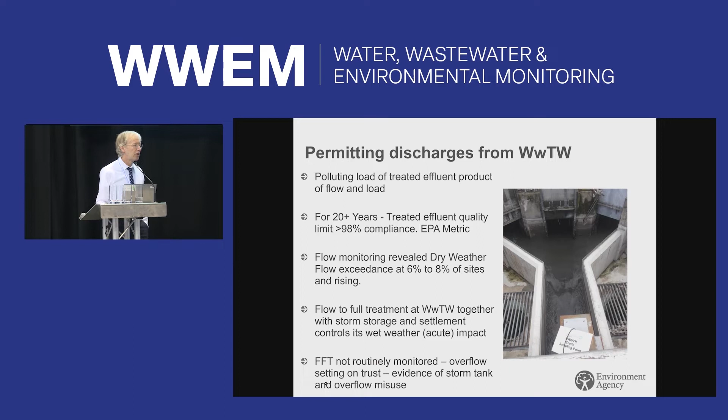The FFT monitoring we put in, whilst we required an accuracy and uncertainty of plus or minus 8%, in reality that was difficult to get without that being part of the funded driver. So some sites didn't meet that. And so it was really a tester. We were trying to justify the need for monitoring because there's a little bit of a chicken and egg going on there without having the evidence of compliance issues. It was not easy to justify to government or through the companies the need for further monitoring.

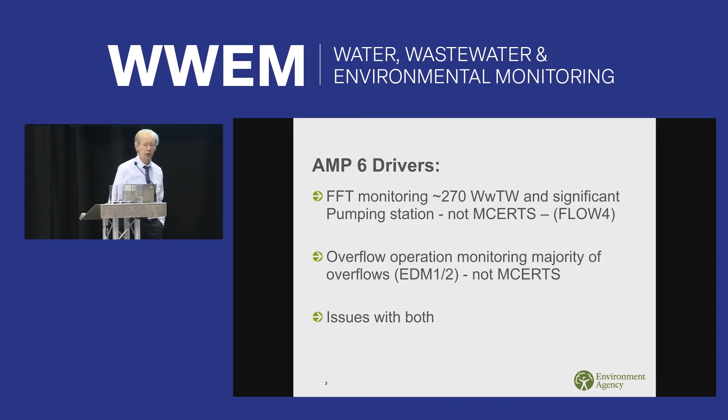So the aims of the PR19 program, which came into effect from 2020, was to improve that regulation for both dry weather flow compliance and for FFT, improve data quality, which had been somewhat lacking, and develop conditions which were more enforceable and more protective of the environment.

So effluent we measure as a total daily volume when we're measuring the effluent flow, the day-to-day flow, and that's MCERTS certified. The current dry weather flow condition, which is the one that governs the day-to-day flow, was improved over 10 years ago and was very much a cooperative driver where we expected the companies under our guidance to manage their FFT, stay compliant with it.

But as we say, because it wasn't a very protective condition, it wasn't a pass-fail, it tended to get overlooked, and there's been a history of non-compliance. The total daily volume is measured as an 80%, a flow that's exceeded on 80% of the days, and it's assessed for compliance against a smaller flow that's exceeded on 90% of the days. And guidance simply requires DWF not to be exceeded.

So if a dry weather flow is exceeded, it prompts an investigation. That investigation is to find out the cause, whether it simply needs an uplift in the applied for dry weather flow and appropriate tightening of quality limits and potentially pass forward flow and storage. But if the investigation found that there was just heavy rainfall throughout the year, so there was no real dry weather flow to be measured, then that was a reason to wait another year to find out if the dry weather flow was repeatedly exceeded.

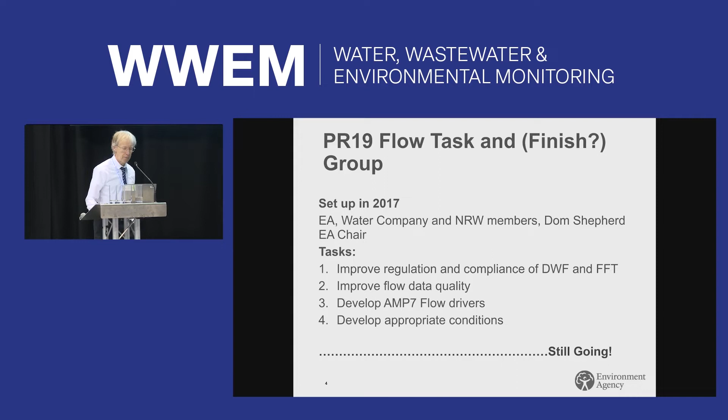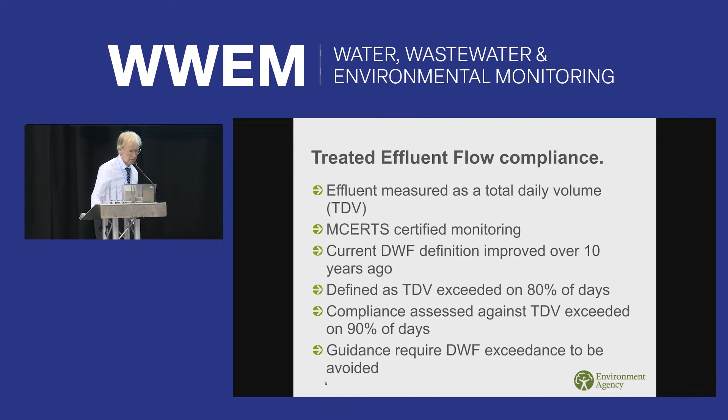So to improve permitting, what we did was retain the dry weather flow limit, but we had new conditions added to it, which only allow 2 exceedances in a 5-year period. If there's a third exceedance, then that becomes an absolute fail. So that will become a clear, unambiguous pass-fail outcome.

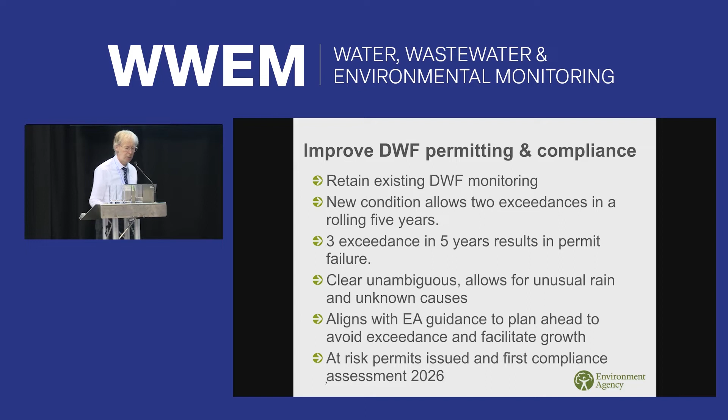This aligns with EA guidance, which was always to prevent dry weather flow exceedances, and it facilitates growth because there's no hold-ups when we're approached for growth. It can take quite some time to get through all the consultation to agree the final effluent limits. So people applying for it after they've already exceeded it was, and still does, cause problems with planning. The first assessment will be in 2026. We've already issued the permits for dry weather flow which were at risk of exceedance, and because they have to look back, first pass-fail will be in 2026.

So why do we monitor FFT then? We've captured the quality and we've captured the volume, and together those give you the polluting load that's being discharged. Well, the FFT, of course, is governing the spill frequency, governing how much spills untreated from storm tanks at sewage works. It's a fairly sensitive setting because it's quite low. It's usually less than 3 times the dry weather flow average. So on a peak, it can quite easily spill if the setting's too low.

And there were pollution incidents caused by settings being too low. There were WFD failures that were unexplained without any evidence of where the pollution was coming from. And site inspections started to reveal issues with FFT compliance. Subsequently, during AMP6, there were high-profile pollution incidents and prosecutions, and that prompted increased interest from public, media, and calls for this compliance aspect to be very clearly transparent.

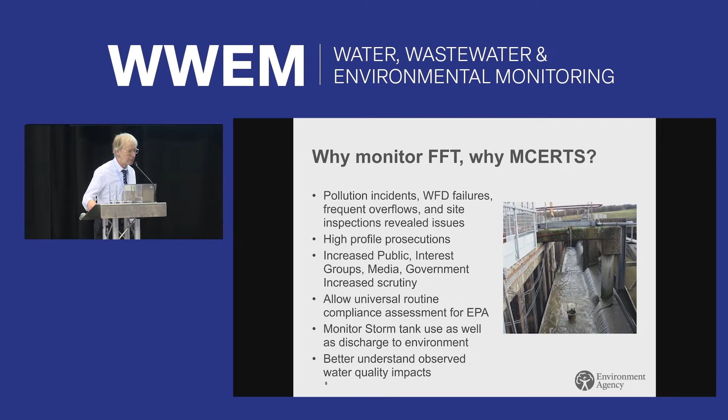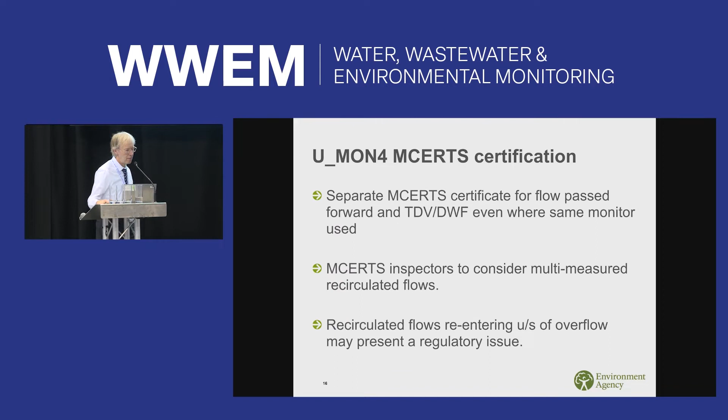So it wants to move. Seems to have frozen. Oh, thank you. It's gone too far now. Yeah, I lost the prompt on the screen. Apologies, it's not wanting to go backwards.

Oh, there we go. Sorry about that.

So, monitoring at FFT: we had a driver in PR19 for event duration monitoring of spills into the storm tank and potentially spills from the storm tank, so we know what's happening there. And then we had a driver called U_MON4, which is to install MCERTS flow monitoring on the flow pass forward at the overflow, and to utilise existing monitors where they're available rather than going to the cost of new ones, and install new ones when needed.

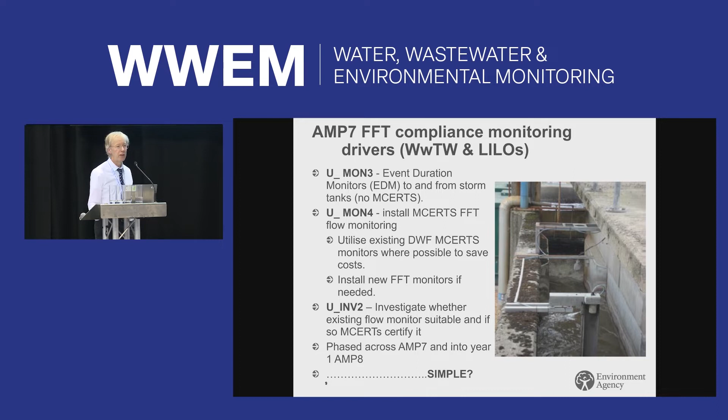There was a U_INV2 investigation which was to look at monitors that may be suitable and to check whether they can be converted, can be adapted to MCERTS during the AMP period, and if they could, they would be delivered in this AMP. If not, they would have to be put forward for the first year of AMP8. That would be 2025-26. And so essentially, by the end of the first year, every sewage works that treats more than 50 metres cubed that has a storm overflow will be monitored for flow pass forward.

So it sounded like a simple driver, but as all things, including this, it doesn't turn out to be. It's not. Yeah.

So companies proposed use of existing monitors. So where they had existing monitors that were not at the front end, not right behind the weir, measuring the pass-forward flow while the overflow's operating, companies thought it may be useful to explore using monitors that are at the back of the sewage works. And there was a UKWIR project carried out to try and find a means of assessing compliance using monitors in that position. Didn't really have a great deal of success, but we left the option open in case anyone came up with a solution.

So during the process the UKWIR project also recommended that EDM monitors also achieve MCERTS, and that was a tough one to convince the companies of, and with it not being funded in this AMP, we've required that at the beginning of the next AMP. And we also had an issue about matching the frequency of data, with the FFT normally being recorded in 15-minute and the spill to the storm tanks and from the storm tanks in 2-minutely. So matching up those flows to assess compliance is an issue as well.

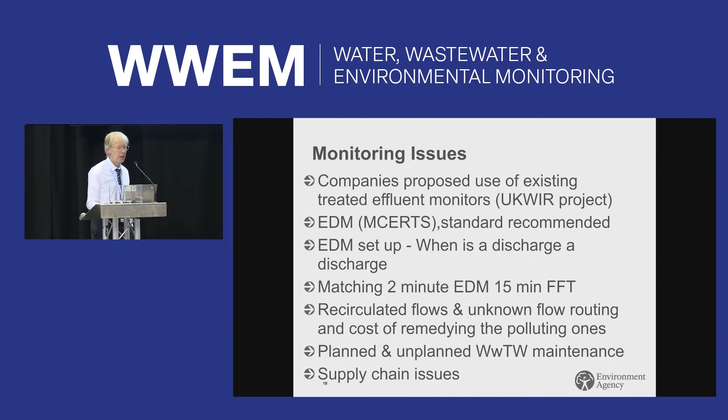And also the companies wanted to use storm tanks in certain circumstances where they were trying to do some maintenance work. And then of course supply chain issues have cropped up as an issue also. So to permit FFT, we already had a condition which basically says the pass-forward flow is a minimum when the overflow is operating. We refer to it as flow pass-forward rather than flow to full treatment, simply because that's the wording in the permits, and it's consistent with storm overflows.

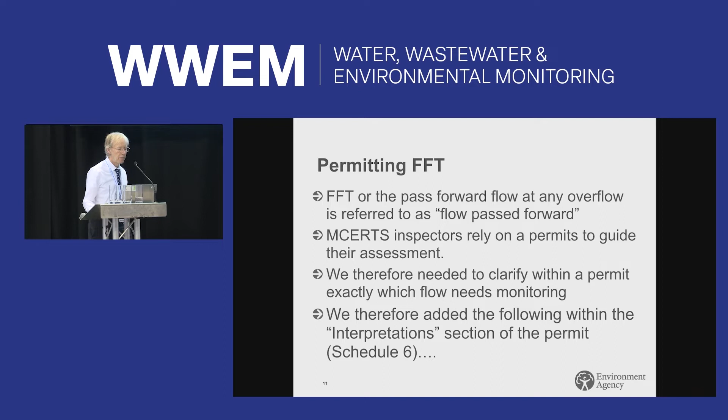MCERTS inspectors rely on a guide as to what flow they need to monitor to be sure that the monitor is monitoring the right flow. So we have to be clear in the permit what the flow is that they're monitoring. And that led to a definition which is up now, and is essentially saying that the FFT is the flow that arrives from the upstream catchment that is then passed forward to treatment.

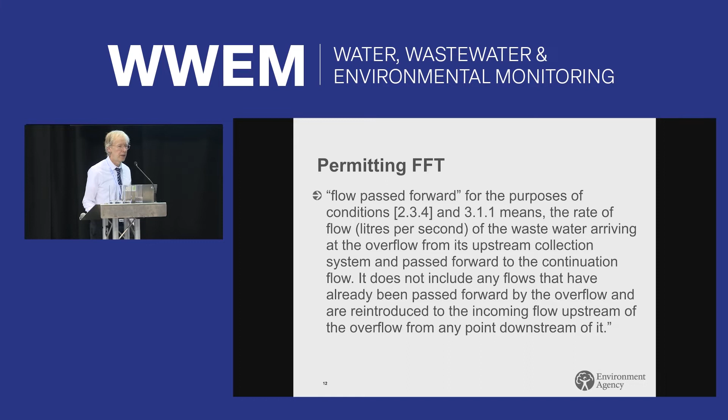Now that sounds patently obvious, and it is, except without that definition inspectors would be left in an ambiguous situation when it comes to return flows. So if there was a return flow which went around the monitor and therefore was double counted by the monitor, they needed to know which return flows to count and which not to count. So the definition was it's got to be from the upstream catchment to be counted.

So essentially the FFT setting condition, the minimum pass-forward flow, remained unchanged, but we added an additional limit so we could measure the performance of the companies rather than it just being a straight pass-fail, in terms of if there was one reading throughout the year that didn't comply with the FFT, then it's a fail, and if there's less than one, it's a pass.

So we added a limit which takes account of potentially the monitoring uncertainty, the monitor in relation to where the pass-forward flow occurs, and we came up with the requirement that 95% of the readings must be greater than 92% of the flow pass forward while the overflow is operating.

And we had a management system objective for the companies to define how they were going to quality assure the data to ensure they only include good data. And then there was a data compliance condition which requires them to have 90% good data for both EDM and flow for 90% of the year, and also that monitors couldn't be down for more than 2 weeks in a row at any one time.

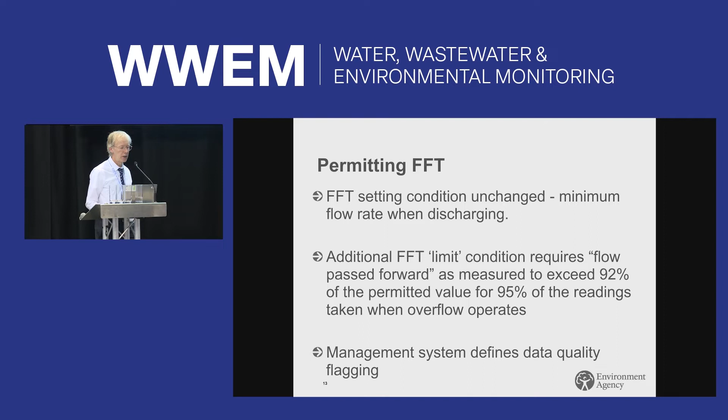In terms of certification, it will be a separate certificate for measuring flow passed forward at a sewage works compared to the total daily volume on the final effluent. That's so we can keep one separate, especially where the same monitor is being used for both purposes. It may pass for one or it may fail for the other. The different requirements are for the total daily volume measurement, it has to be plus or minus 8% in terms of the volume, whereas for the FFT measurement it's plus or minus 8% in terms of the flow pass forward rate at the FFT. So it's two different requirements even where it's the same monitor.

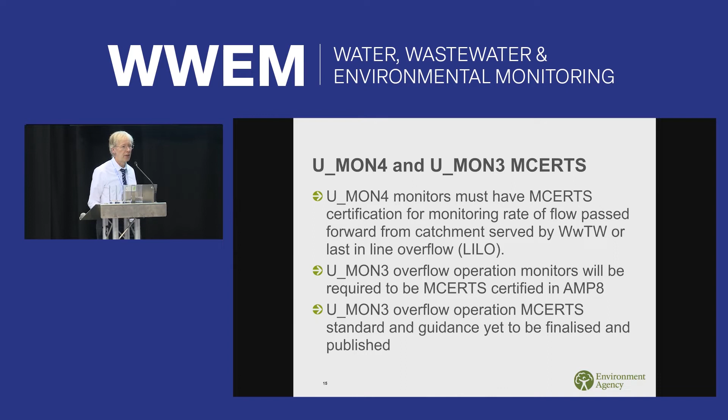Where companies want to use monitors that are not in the ideal position, just downstream of the storm overflow, it's their responsibility then to try and ensure that the monitors are reflecting a flow that is the flow that's come from the flow pass forward, and it's not been altered by pumps, siphons, filling and emptying of tanks or anything like that. So that element of the variability in the flow that might occur at a monitoring site, if it's not an ideal situation, is for the companies to deal with.

So U_INV2 investigations, these have proved problematic as well. We need to prioritise use of influent meters where they exist and they can be converted, unless they need extensive civils work. So clearly there's a grey area there that we've had to negotiate. And where they're suitable, they must be MCERTed in this AMP and therefore up and monitoring before the end of 2025. Where there's no suitable monitoring, then they can consider monitors that are not in an ideal position. Again, if they can be made suitable, they should be in this AMP without additional major works. Where there's no existing monitor, then it will be year 1 to 2 of PR24, the next AMP, so that'll be 2025-26.

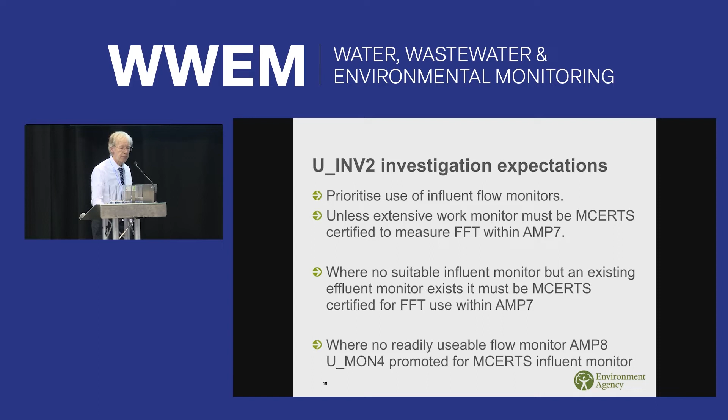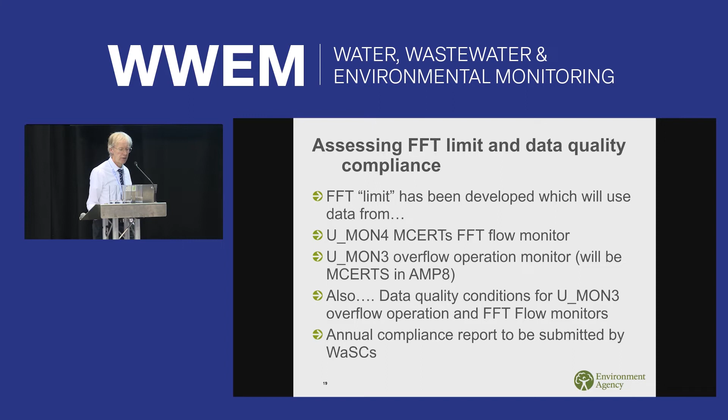So for assessing flow to full treatment, we use both the data from the FFT flow pass forward and from the EDM, and also the data quality conditions. And that annual report that the companies have to submit will inform the future EPA, which gets very good press coverage, so it will give them additional incentive to perform. How it's represented is yet to be confirmed.

Skip that. Running out of time.

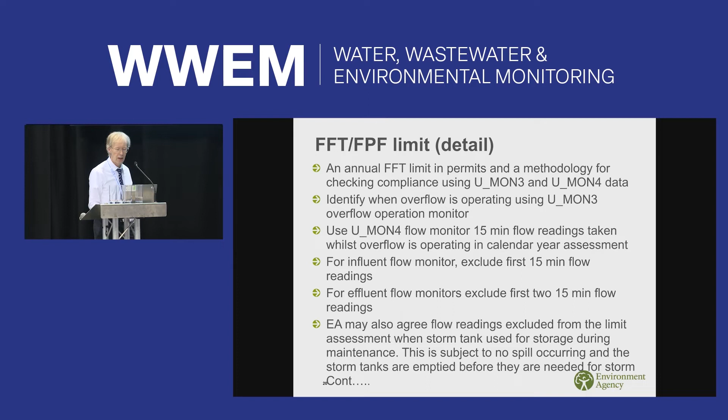Yeah, and just to say, in order to overcome that ambiguity between 2-minutely and 15-minutely data, we allow the first flow reading not to be included as part of the compliance when the overflow starts. Because of the lag through the system, if it's a monitor that's not at the ideal position, if it's post-process somewhere, then we will allow them to have the first two readings excluded from the analysis, and we'll have to check after that we've got enough good readings that we can fairly assess compliance for those sites. So that's covered that.

And then there's always a query, well, what if an overflow occurs in short bursts? If it's got a pump that's delivering a pulsed flow past an overflow and it's spilling frequently, we're only measuring flow at 15-minute intervals and spills at 2 minutes. We'd be recording spills where the flow wouldn't necessarily be compliant with its FFT. In order to be able to assess that properly, when we're excluding the first flow reading, we've said in AMP8, so in 2025 onwards, the monitoring frequency for measuring the flow will be increased to 2 minutes also at all sites where it's possible.

So, summing up, the regulatory focus on effluent load by improving dry weather flow is a good move. It takes away the sole focus on effluent quality, which could result in flow being compromised. We're addressing, hopefully, the increased challenge that's coming from the public.

The companies will be making all this data freely available for anyone to analyse and to look at. We ourselves will be obtaining the data, and we're not just looking at the straight compliance statistic. We will be looking at what's happening in those 5% of the period where they appear not to be compliant, and we will be looking at potential dry weather spills which are occurring even though they are compliant with their FFT. So we'll be looking at rainfall in conjunction with that data.

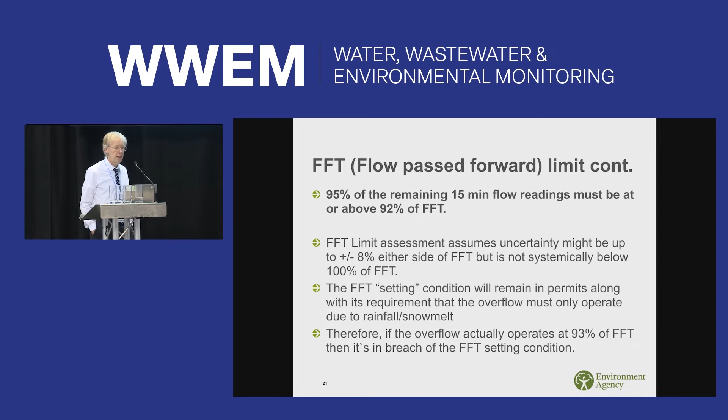So for AMP8, the bit I think Oliver wanted me to mention, as I say, we have flow to full treatment, 2-minutely data. All the flow, the spill to the storm tank monitors that we're putting in this AMP will need to become MCERTS in the first year of the next AMP.

And then, hot off the press, we've just had approval for 6,000 further emergency overflow EDMs to have MCERTS and to be installed in the coming AMPs. And that will be at the back end of the AMP, and this is a big shout out really to the MCERTS inspection fraternity, that we've ended up with a situation where there's a huge hump in MCERTS requirements towards the end of this AMP and the first year of the next AMP, and on its own that might pose problems for MCERTS inspection companies.

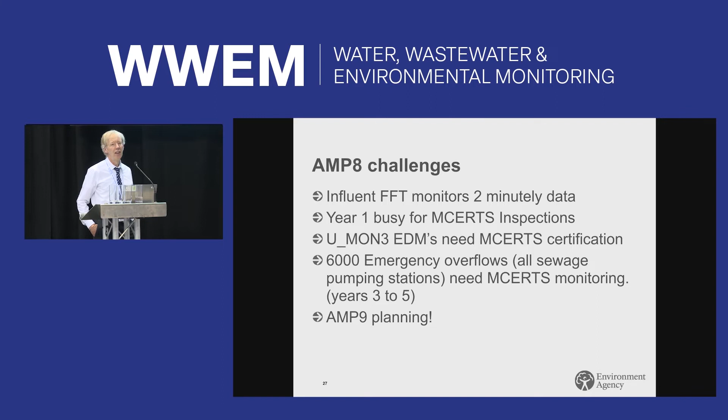We're hoping they can gear up, recruit more inspectors, and this 6,000 monitors that's coming in for the final 3 years of the next AMP would hopefully give them the confidence that there's plenty of work going forward. That we'll be able to flatten the hump by having perhaps two years, I can see some of this, 2 years heavy load in 2025, 2026, and then follow that on with the 6,000 monitors in the following 3 years.

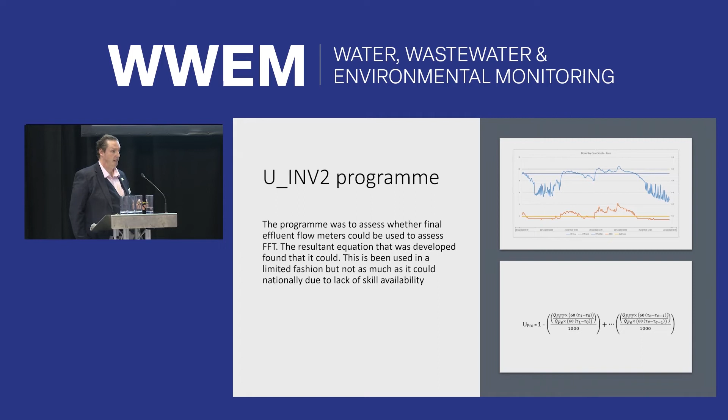And it's quite good. We did develop a process uncertainty. I think the sticking point with the UINV2 program was nobody could quite work out process uncertainty. If you want the calculation, there it is. And that's been given to the water companies. And it's looking at the delay through the treatment works and depending upon the complexity of the works. It is possible, but it's not easy to do.

UMON 3 program: if you didn't bother doing this early within the AMP, I think we found out probably too late. If you didn't bother doing it early, you were stuffed with the UINV2 program. This I've actually nicked from the Thames presentation, which is part way through this presentation. It's quite a neat install on the side of a channel.

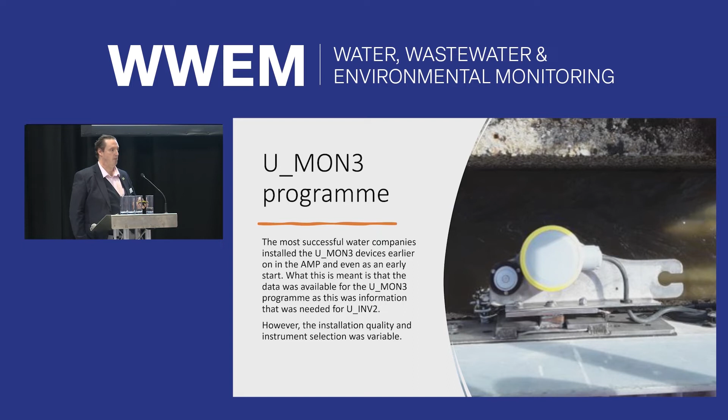But I think with UMON 3, there's been a very variable amount of installation. Some great installations like this. Some not so great. That's a capacitance probe on a weir. That green and yellow labelling says UMON 3 and EDM2. And when I went up to that capacitance probe, I could move it about 90 degrees and tap it against the side of the weir.

So when an MCERTS inspector goes to that, they're going to laugh maniacally and walk away. And quite rightly so. This was actually really important to do properly, especially for EDM2, because you know when you went to storm,

yeah, Mark, don't stare too much, don't take the mickey on us.

But yeah, this is looking at installation, not a fag packet way of doing it, and doing it properly first time. We all know it, we all talk about it, why don't we do it? At the end of the day, it's going to get inspected, and that's going to fail. Remember, this is all regulatory data that's being reported to the public eventually from 2026.

The UMON 4 program, we got a lovely present halfway through. And when you're designing, I'll go to this. Everyone's seen this curve. It's a very standard curve. The earlier you get something within the design process, the less it takes to change it. So when we got this nice little table halfway through, I think it was about a year ago, rightly talking about wash water flow monitoring, talking about returns being in the right place, and a variety of rules.

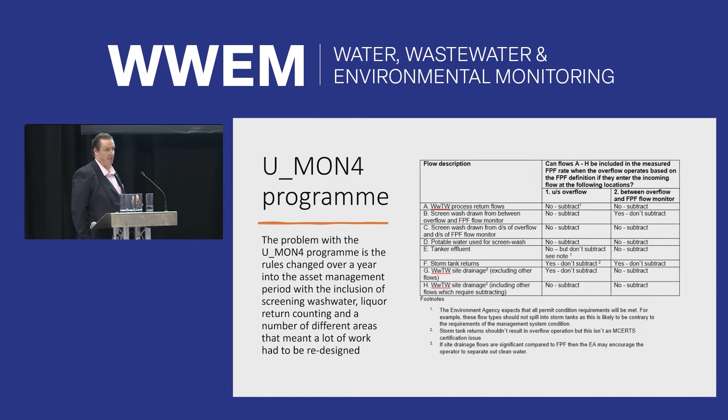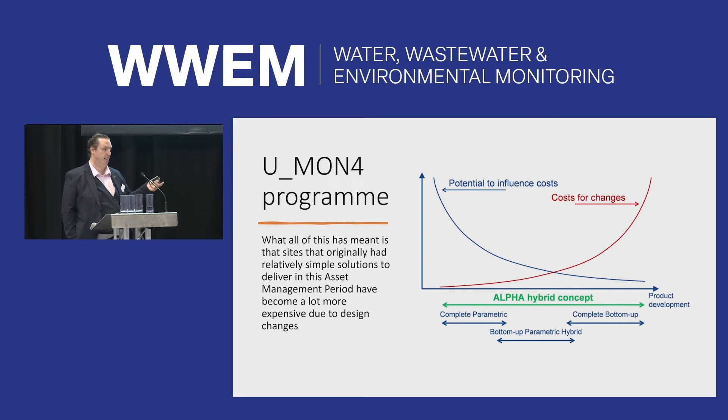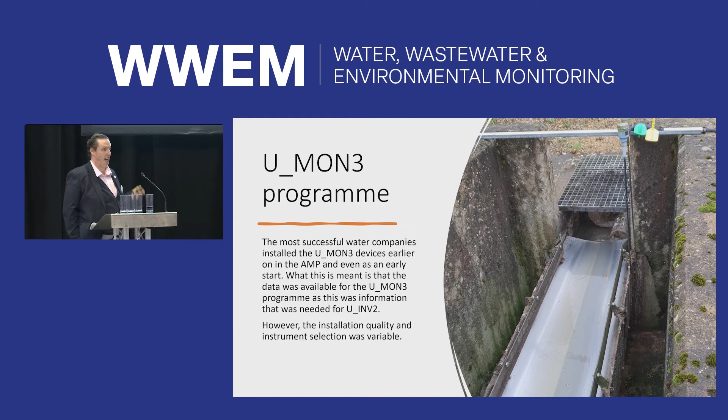So as I said, the sooner we know things, the sooner we can set the rules, and at the end of the day, the fewer changes we're going to have to make, and programs can ramp up. We're talking, okay, simple things in UMON 6, level monitors, but we were talking those simple things in EDM2 last AMP, and that was installed. So in some ways, we've got to get the right thing in the right place in the right way. The least ambiguity, the better.

And I think the original plan, and it's probably changed, Rob can either nod at me or wave at me, was to install all of the AMP8 flow meters in the first year. Well, if their job's like that, not a chance in hell.

But in some ways, we've got to, because next AMP we've got UMON 4, we've got Section 82, we've got UMON 6, and it's going to draw the entire installation skill in the whole of the UK. That is what we are looking at the minute. Every single instrumentation installation company in the UK is going to have to be working on Flow, Section 82 or UMON 6. There's going to be no more work.

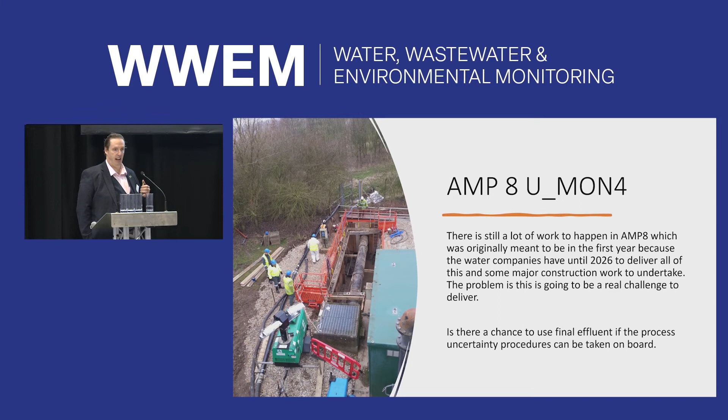Great to see, because we're going to need something around 1,400 instrument technicians in the next 10 years to do this sort of work, to do the maintenance work, to do everything. We just do not have that capacity in the UK, even if we took every single instrument tech in the whole of the UK.

So this is where it switches over to the Thames. The person from Thames kindly gave me the slides. I haven't fully reviewed them, so I am going to be slightly reading from them. But this is what has been done in Thames. This is what the Thames Challenge was. So 121 U_MON2 investigations in year 2, 238 U_MON3 installations, 118 U_MON4 pass forward flow,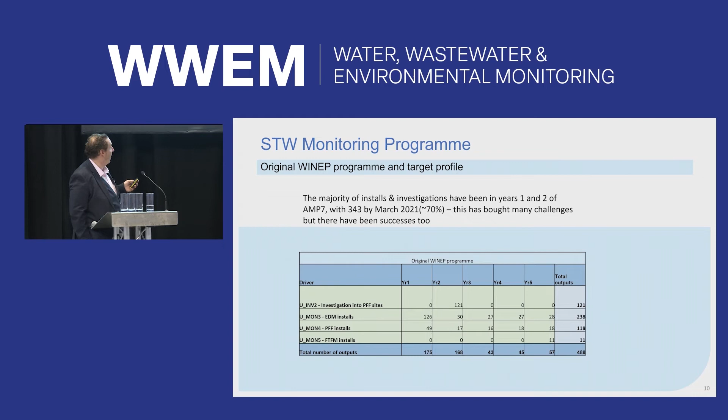and forget UMON5, it's new treatment works. Well, small treatment works that come under the MCERTS driver. So 400, almost 500 outputs, and some of that's planned in the future, because where are we right now? I think April will be year 3. So year 1, 2 is what they've actually done. That was the original WINEP program. There's still a hell of a lot of work to do.

Access to sites, the business systems. We're moving to 2-minute data. I don't know if anyone's done the calculations, but at 2-minute data, every single instrument is going to be recording 250,000 pieces of data every year. The challenge of managing that data and managing that data quality within the water company is insane, absolutely insane. It's going to be huge undertakings.

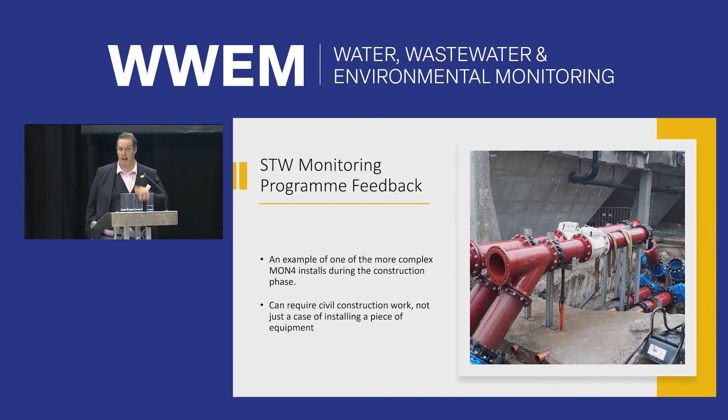Year 1 of AMP8, I'm guessing we've got something like 400, 500, 600 installations to do. It's not going to happen. When you have to build things like this, that takes time. And it's not just as simple as installing a bit of kit, especially for UMON 4, where we may have to rip down the front end of a treatment works, and we've known about that for a while. But Rob covered the next bit.

What are the challenges of 2-minute monitoring and the implications? So one of the things that I know has been mentioned within the industry is penstocks. Yeah, I'm looking at you, Mike.

Here's a penstock from a wastewater treatment site. The penstock in the background weighs about 9 tons. You're not going to move that very quickly. So that penstock probably moves about 20 mils every minute. No more than that. If you do, the whole penstock will start dropping into the water, and it gets very, very messy. But also the recording, can we control the whole system that fast?

Yes, we could potentially raise up the FFT so the flow is always above that FFT, but there's a cost implication of that. And that cost implication, certainly on large sites like this, is enormous. It can be millions upon millions upon millions of pounds. There's going to be challenges with control equipment. There's going to be a step change challenge on data management.

I remember with the smart water metering that's being put into Thames, their biggest challenge of putting hourly metering on customers was data. They had to stop at one point, and they had to set up a whole separate IT system within the company just for the data. Are we going to have to do that with this? More than likely, yes. And so there's going to be costs that may not have been thought about within the program around data management. And moving to 2 minutes just makes that 7.5 times worse.

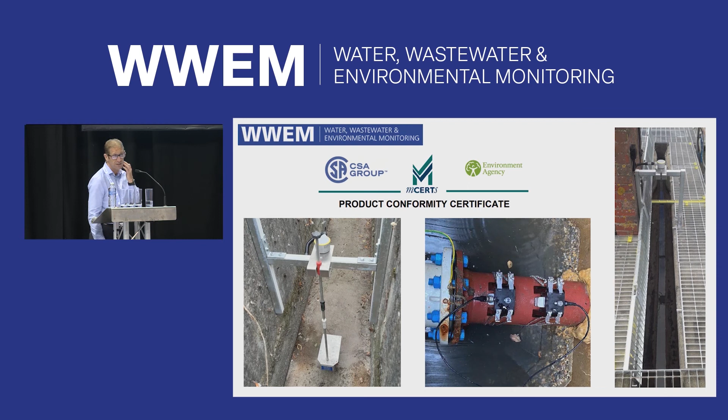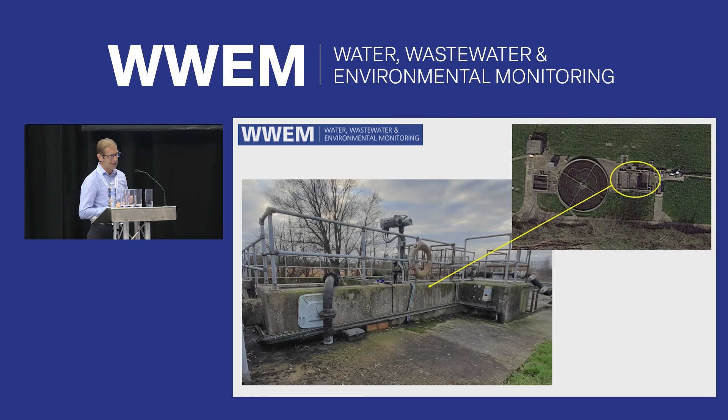But when it comes to the actual installation on site, what we've found is that the majority of sites were never designed with any, or very little, consideration for measuring the flows coming into site after storm separation. On some sites, like this one as an example, where you've got a combined inlet works that has the storm storage, the storm overflow, primary settlement, all in the same structure, it doesn't give us much room at all to install a suitable MCERTS product.

What we do look to, though, is to be as light a touch as possible on site. Compliance is always key to us, and to be the least intrusive we can. So looking at ways of installing flow meters that are non-contact, that don't interfere with flows if we can, is always one way of having the least impact on site as we possibly can.

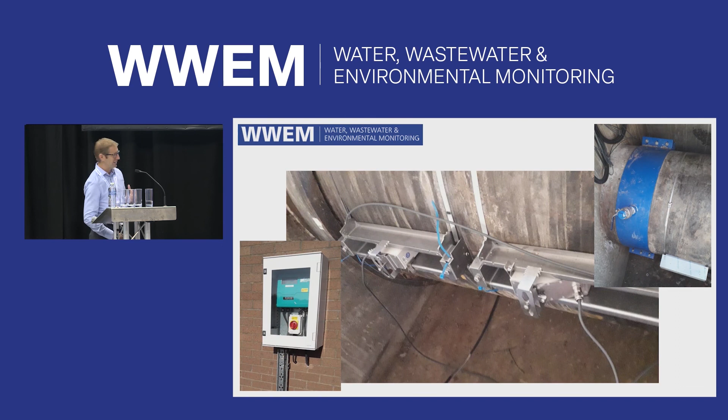From a commercial sense, it means that we don't actually have to manage the flows. Managing the flows is one of the biggest issues that we face on installation. So we try to keep that down to a minimum, and keep that cost down to a minimum as well to be commercially viable. This is particularly important when we have to install a new flume.

So we try to use the traditional over-pumping techniques almost as a last resort. What we've found on some sites is that if we can manage the flows by bypassing them, like the typical bypass pipe you would have for a mag flow install, doing that with an inlet flume means we reduce the management costs of over-pumping. We're also reducing fuel costs, and admittedly the installation of the bypass pipework comes at a cost,

but what we've found is that not only is there a cost saving in doing that, not on every site, but on a lot of sites, it also is less impact to the site. What it also does, when we look at site control, is that we might be taking an existing inlet flow meter offline.

It's very hard to establish, and unfortunately, existing control drawings and existing parameter settings aren't readily available. And even though we've interrogated the instruments, we've found that there aren't any relays that are used for control, but that doesn't mean that the 4 to 20 milliamp analog signal isn't used elsewhere on site for chemical dosing and such like.

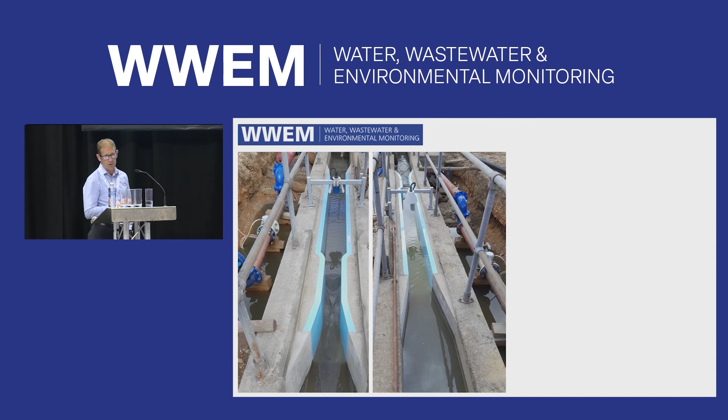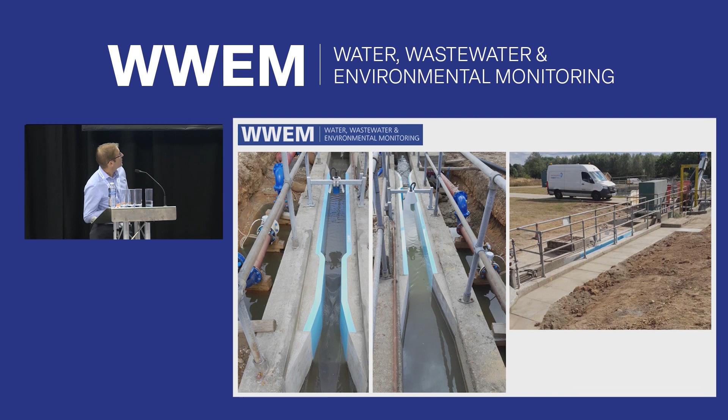On this particular one, we didn't need to install a check valve, but that is a consideration that we'll go to. Each site is different, and so on some sites as well, we would also install a maintenance point so that pipe work and the flow meter sensor could be cleaned on a daily basis. That is the same site after we've done the reinstatement and kind of finished the work.

So another option we can look at is constructing adjacent to an existing flume or pipe. Again, it's to keep that management of flows down to a minimum amount of time. So here we would just need to manage the flows whilst we're then connecting the new flume into position.

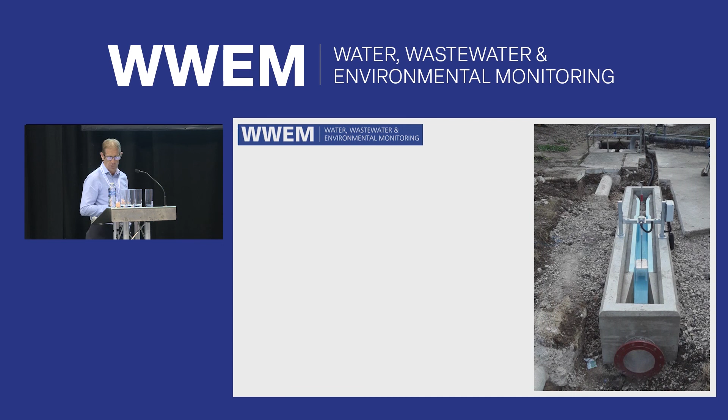Yeah, it's so similar to what we do for TSFR anyway, and we've learned a lot through the years on that, and it's just adapting it to inlet works, which has its own, we're dealing with raw sewage rather than final effluent typically, which on the cleaning side requires a little bit more attention, but in general the principles are the same. And that was the same site after we've reinstated.

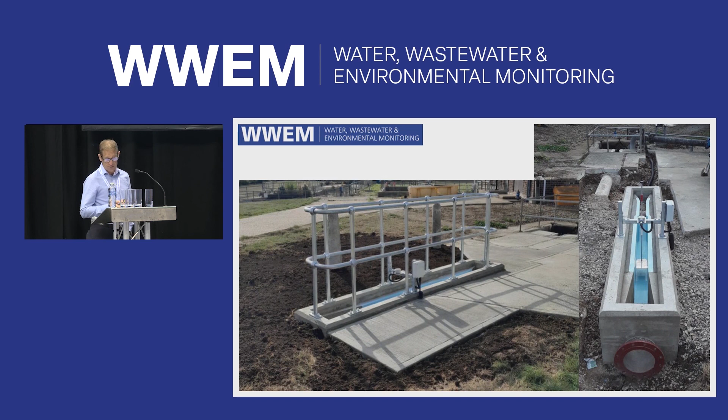So mostly I have spoken about the primary devices, but the selection of secondary device as well is also key. This is maintainability, which is what I just missed out. So with regards to MCERTS, we're taking a basic process flow meter that has had very little or no maintenance done in the past, and to get an MCERTS accreditation where it requires it to be maintained, and on a CDM element as well, we've got to look at how that can be done and how that can be done safely.

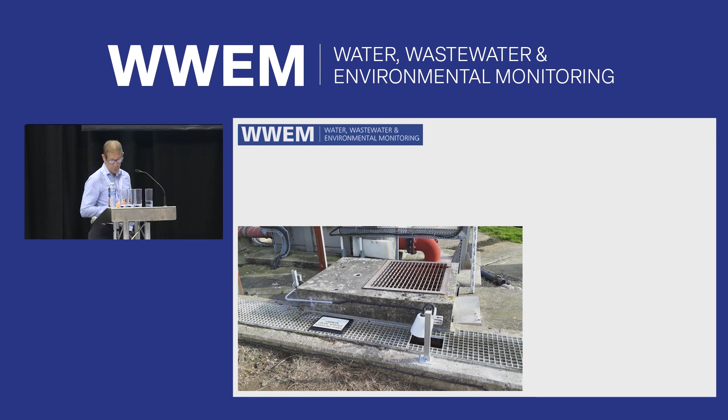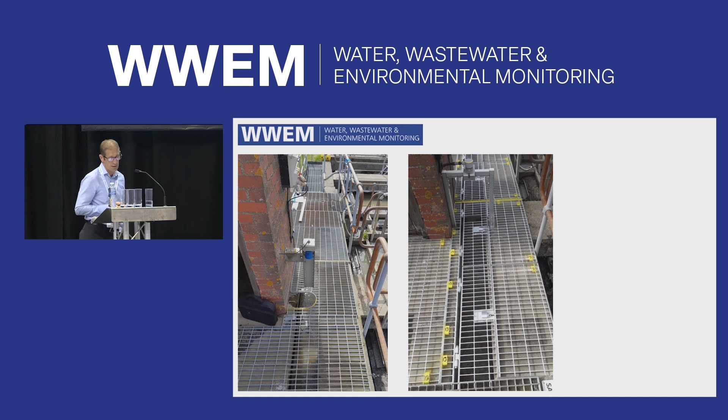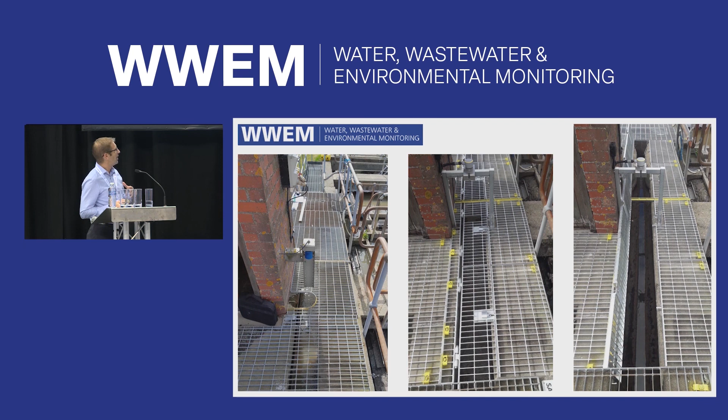A great number of inlet flumes have literally just got covers over the top. They're used as walkways, so it's just then adapting that to either open the area up so that maintenance can be done easily and safely, or where the walkway is needed for regular access, then we look to install hinged covers that are lockable, which maintain the minimum asset standards with Anglian Water, to allow that maintenance to take place. It's just another consideration of how site can achieve MCERTS, and ultimately if you make something easy to maintain, there's more chance that it's going to be maintained.

The other thing is the secondary device, so the actual instrument itself, and the selection of that can be key in how we can reduce costs and also maintain MCERTS. So apart from actually using the MCERTS device, we look at using instruments that can provide a more cost-effective solution, and advances by the instrument manufacturers provide instruments that would enable both UMON 3 and UMON 4 compliance. And this is just one example on a number of sites where we've already adopted that, to be used in the future on UMON 3. So by using the instrument that will do both, just on UMON 4 at the moment, it will only require a small investment for UMON 3 in the future.

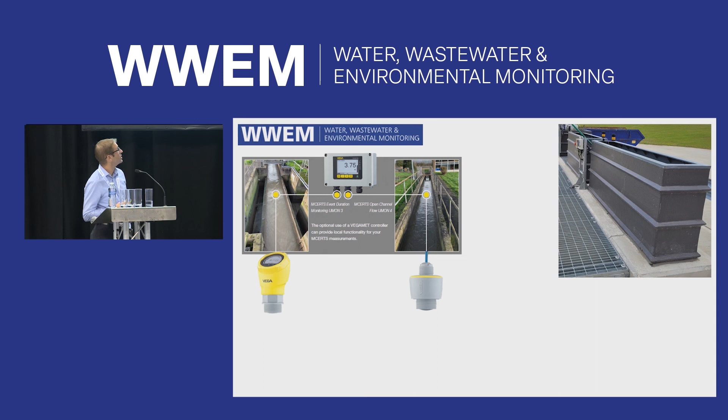But currently we're looking to plan alternative construction techniques, so things like off-site construction, again to just minimise the amount of site time, and use of composite materials as opposed to the more traditional. And I think these methods will continue to grow and become more widely available and cost-effective options.

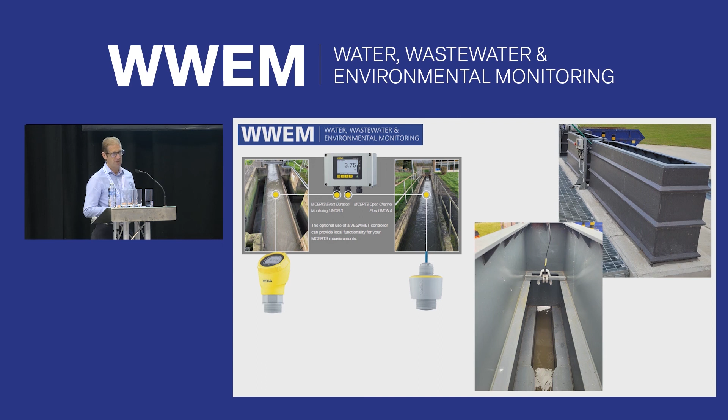So going forward, really, the challenge is to attract not just people into the industry, but the right people with the right attention to detail, and to continue to look at new technologies. One of the good things about conferences like WWEM is that it gives us that platform to see suppliers in one place, for them to put on show their latest advances and products in technology, and also to confer and share ideas with each other.